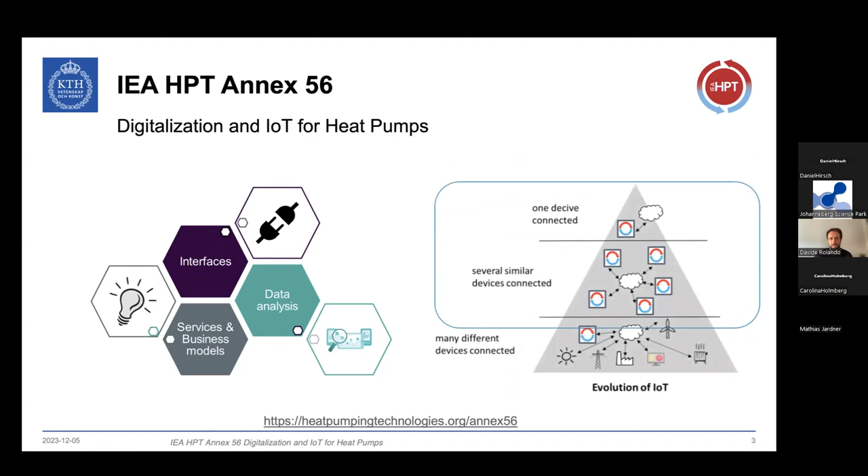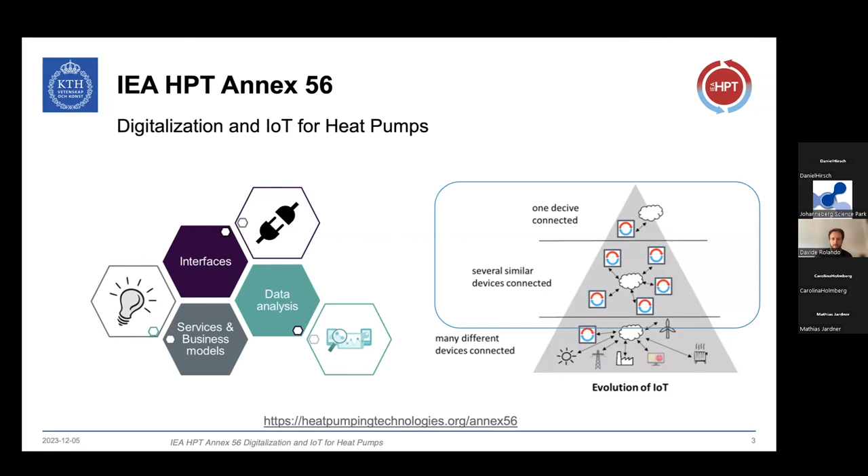Just to define the boundaries we moved within for this collaborative research, you can see them depicted here. We explored the challenges and opportunities of digitalization and IoT technologies for heat pump systems in the case where the heat pump is not just a single unit, but where potentially several units are communicating with each other, and the heat pump is integrated as one of the subsystems in a building.

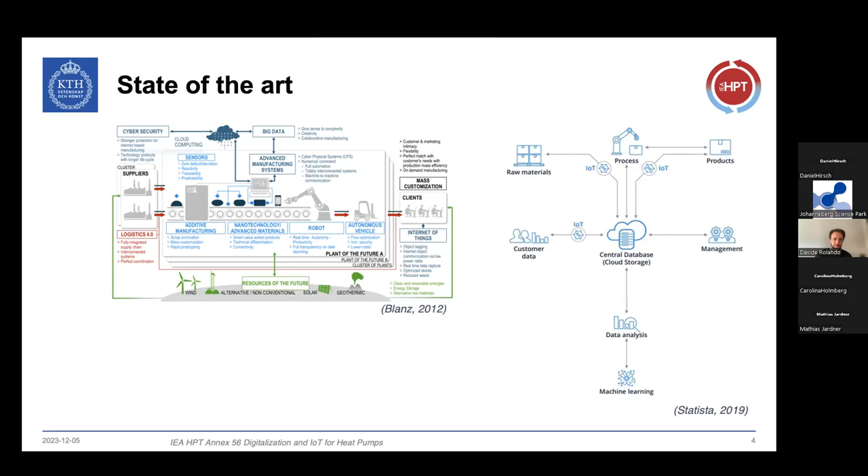I was coordinating the work for delivering the report on the so-called task one, dedicated to the state of the art. In that report, which I invite you to read, and I will tell you later where to find it, we started with the definition of Internet of Things that probably everybody has heard of. But it's important to focus on the definition and what it implied for the industry and for the development of this type of technologies.

In this definition, from 2005, there is a marked shift in paradigm from what was conceived until that time as communication machine to machine and between persons and computers. At that time, the idea was that communication was extended more broadly to things, in a broader sense, not just specific devices, which would be capable of transmitting and communicating information to each other, to other machines and to humans. And this marked a shift in the industry, where buildings and all the subsystems in buildings were also involved.

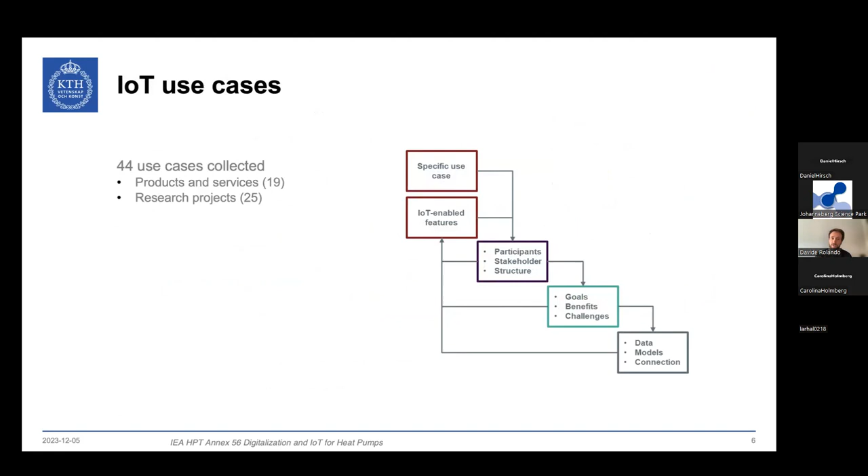So what we have done within the annex, to clarify what is possible to do with these solutions, is we collected a number of use cases. All the countries involved in the annex collected a few use cases. 44 use cases were collected in total. They are divided in two separate types, products and services and research projects, and they were categorized into these 5 categories.

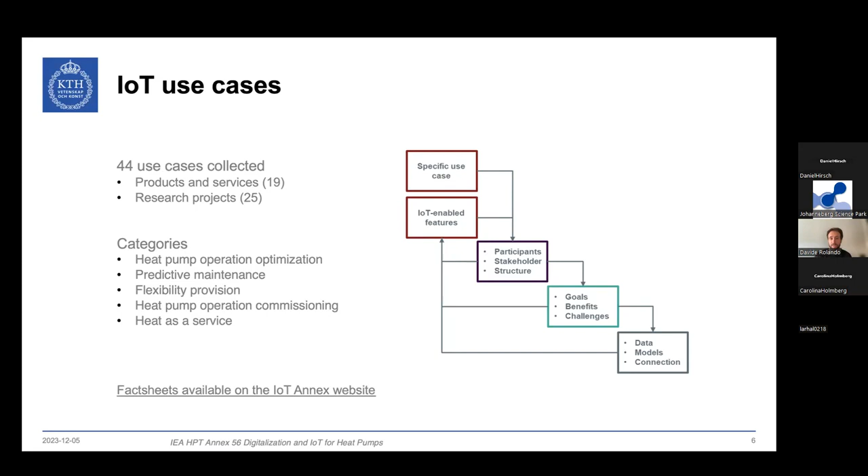With the idea of having these use cases easy to browse and as informative as possible, we defined this template, this framework, to which the use cases were framed, and we had one fact sheet produced per use case. On the Annex 56 website, you can browse the fact sheets by type, by category and by country. The fact sheets are just 2 pages with a very straightforward summary of the use case.

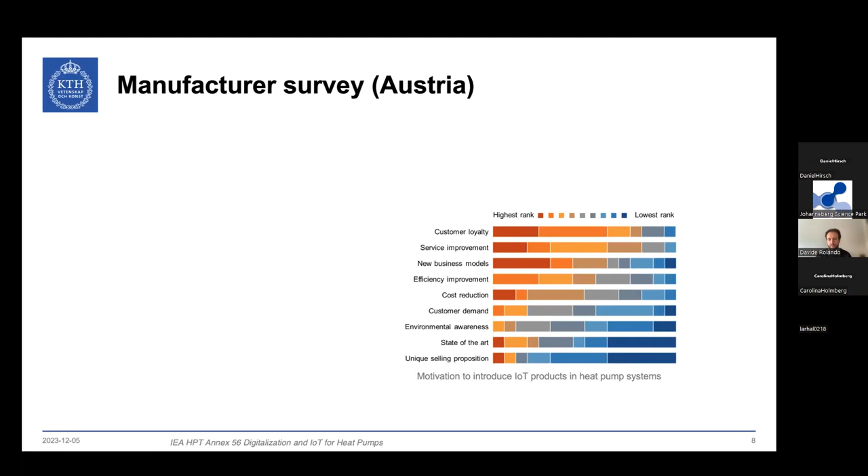But also in this annex and in this project, each country carried out some specific tasks. For example, in Austria, there was a manufacturer survey promoted by the Austrian Heat Pump Association. It consisted of about 50 questions and was circulated through the affiliated companies of the Austrian Heat Pump Association, and a total of 16 companies participated in the survey. You find the results in the report.

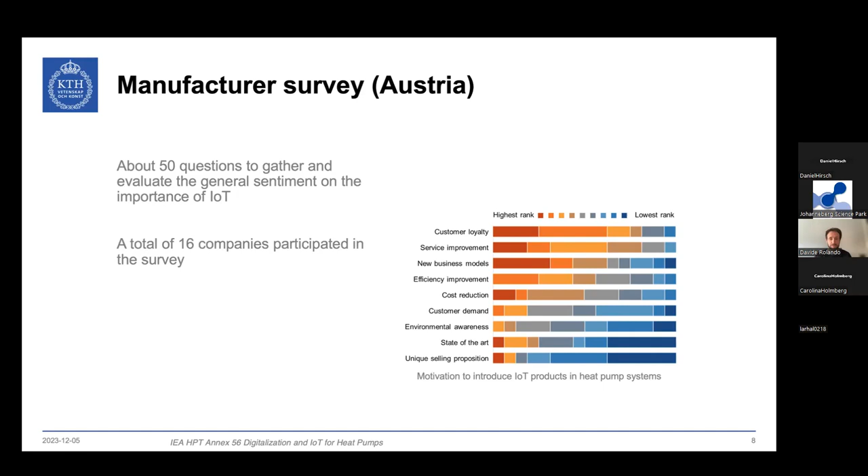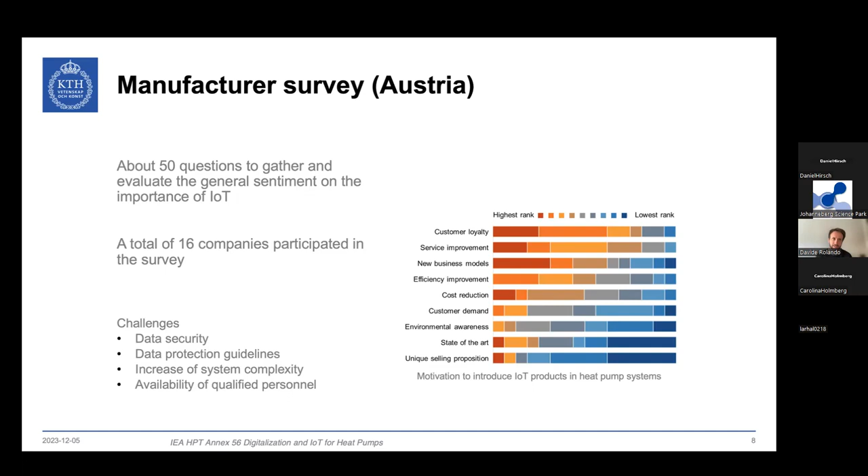Here on the right you find just an example of the type of questions and results and how this survey was formulated. It was clear from the results of this survey that there are some clear challenges when it comes to digitalization, related to data security, the lack of data protection guidelines, the fact that digitalization also implies an increased complexity of the system, and the lack of qualified personnel when you want to embrace the digitalization of your system.

At the same time, I personally ran, from the Swedish side of these international specific tasks, expert interviews where I involved heat pump manufacturers, IoT companies, the Heat Pump Association, and consultants. It was not structured as a survey, but more like a chat with predefined questions, so that in principle we went through the questions first.

And the result from that experience was that there was full agreement about, of course, the potential that comes with digitalization for heat pump systems.

There was also agreement that there is a perceived and also a factual lack of guidelines that most of the times leave the actors in the industry a little bit uncertain on what path to take for moving forward towards the digitalization. And the need of demonstrators was also something that was pointed out during the interview, and was common by the people that I interviewed.

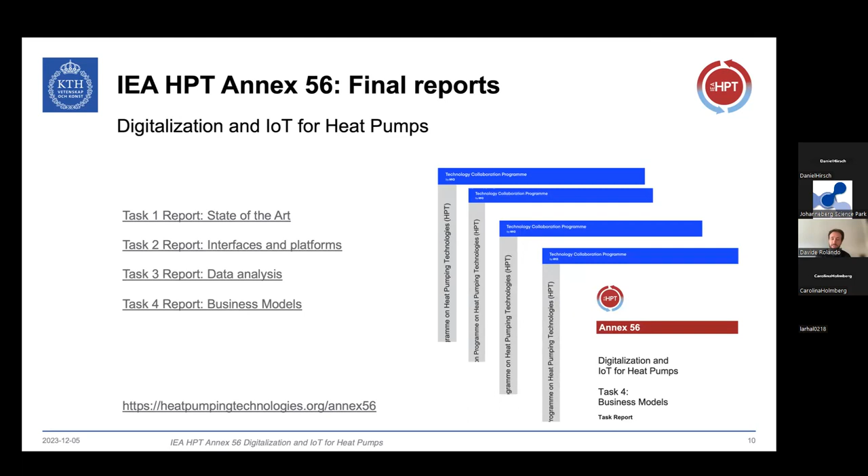Other than the task 1, there was a task 2 connected to interfaces and platform. There was a task 3 dedicated more specifically to data analysis, and the task 4 report was dedicated to business models. That was the international collaboration part of this project.

But then more specifically in Sweden at KTH, we run an activity that was related to digitalization for heat pump systems, and more specifically to the development of data-driven soft sensors. Why that? So in the last few years and in previous projects as well, we noticed that heat pump systems today are equipped with sensors, so data is not lacking.

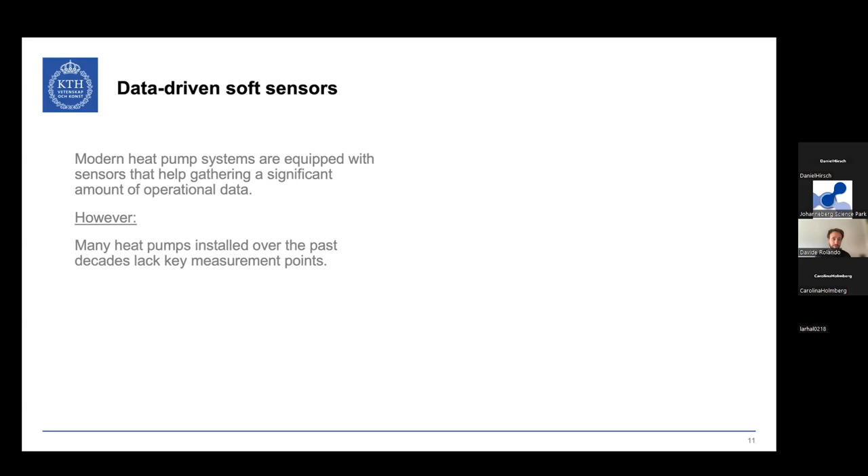The problem is that most of the times the quality of the data and the design of the data infrastructure for these systems is not always satisfactory, to put it in this way. And the issue with this is that you have incomplete set of measurements, and you have a design that oftentimes prevents the elaboration of even simple tasks like tracking the system performance.

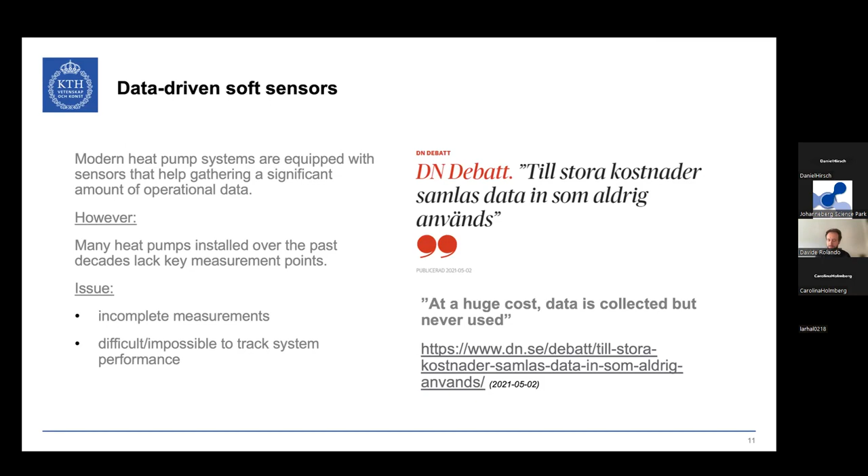And for this reason, and this actually was also, let's say, reflected relatively recently in public. This is an example from a newspaper from 2021 that was marking the fact that data is not missing today, but we are not using it properly.

And we developed a full PhD project out of it with the idea of taking the incomplete set of measurements from a heat pump system, try to enrich it with advanced modeling, and try to figure out what is the potential for enriching incomplete sets of data so that we can retrieve meaningful information out of it.

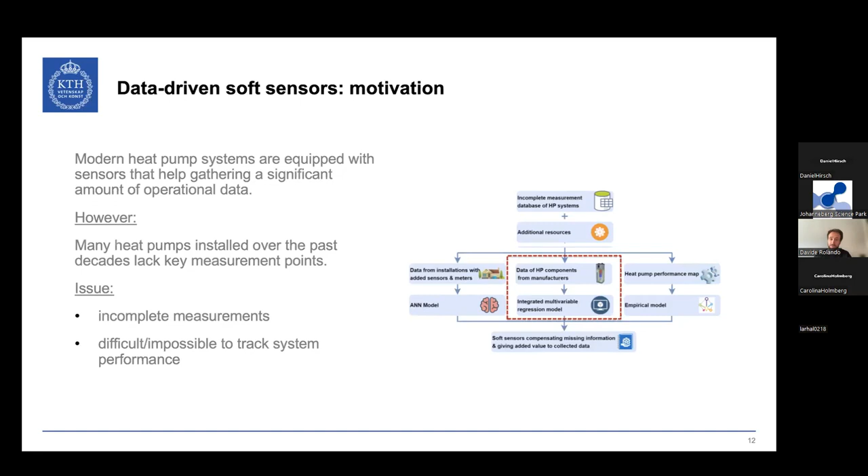The potential for this activity is multifaceted, in the sense that we want to work with data sets that have been collected so far, maybe over years, and the information is covered because, again, the design was not performed properly. For example, the data set could be not complete for other reasons. And with the combination of advanced modeling to the incomplete data set, we want to show that it is possible to give added value to the data collected.

At the same time, for new systems, there is a potential enabled from this type of activities and from this PhD project especially, that is related to the fact that you can optimize the cost of your monitoring system if you have a way to develop soft sensors that can, in a reliable way, replace potentially costly devices for your monitoring system. And this would enable services, for example, connected to performance degradation and fault detection, that oftentimes require a full monitoring system deployed.

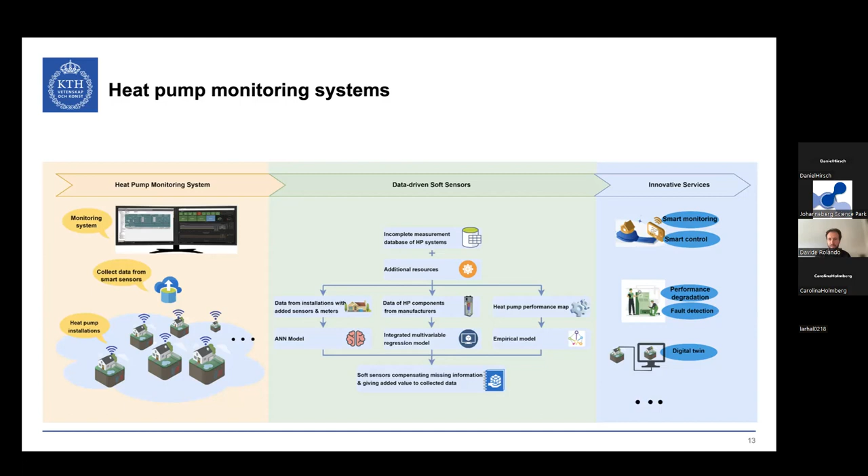From previous projects run at KTH, we know that, where the reported faults to heat pump manufacturers were collected, contrary to what it could be expected, the control and electronic faults were the ones with the largest share among all three types of heat pump unit that you can see here.

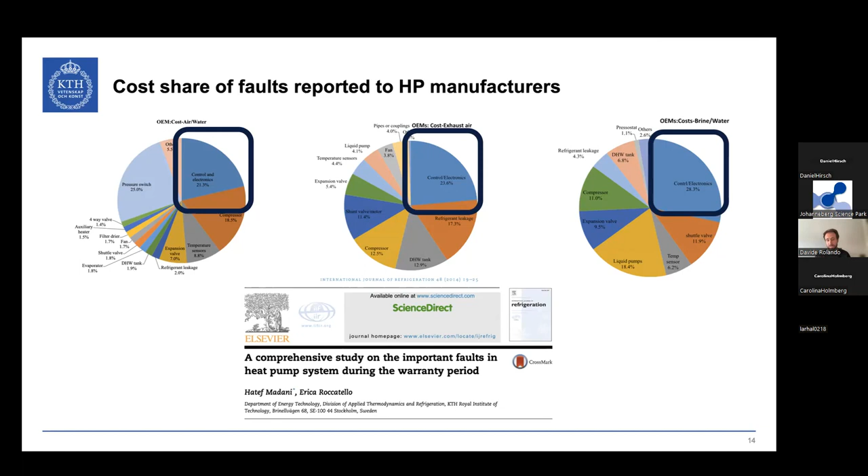So for this reason, we believe that this activity is very relevant to enable services that can help the fault detection topics.

I cannot go into details of the results here, but for example, in the first publications from this PhD project, we compare the potential of three modeling approaches and a combination of three modeling approaches. And we found out, for example, that artificial neural networks have a huge potential, provided that the collected data comes with a reliable level of accuracy.

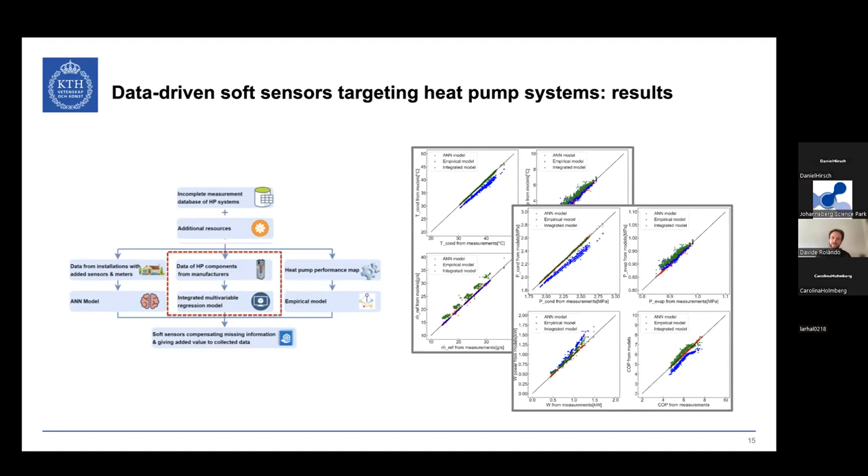These activities and this project were presented also at the International Refrigeration Conference in Paris in August, and it's been presented this week at the International Conference on Applied Energy. The project will finish in the middle of 2024. So I invite you to follow up for the final results of it. And this was all from my side. Thank you.

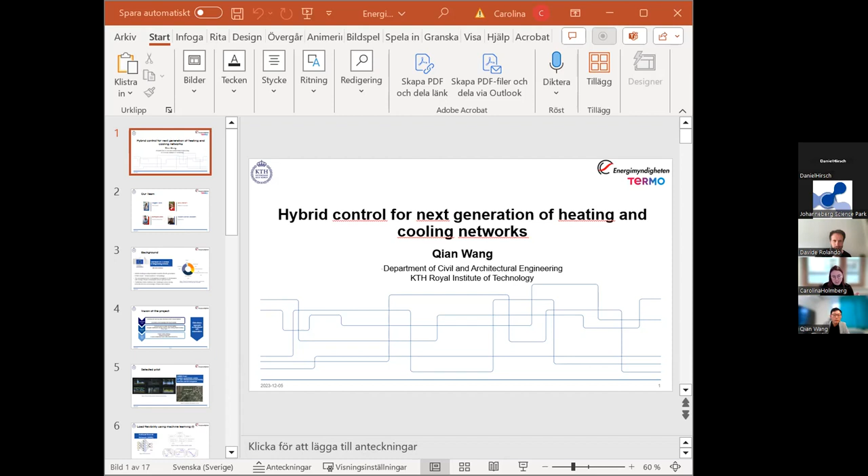Thanks, David, and thanks, Carolina, for the instructions and also the presentation. Please let me know if you could see my presentation. We can see it, but it's not in presentation mode. Okay, now something is happening. Is it better now? No, it's the same. We'll stop sharing and share the screen again. I don't know if you have two screens right now; you might want to change which one it is. Okay, now we still see your notes. If you press slideshow from the beginning in the upper left corner, I think it will work. Nothing is happening. Do you want me to try and share your presentation instead? Yes, please. How does this look for you? No, same problem as before. In that case, I suggest, Qian, that you share your presentation yourself and minimize the pictures at the left bar. Sorry for the troubles. I will just maximize the slide. Perfect. Or as close to perfect as can be.

Sorry for this. Yes, I will start with my presentation, and I'm also from KTH, Department of Civil and Architectural Engineering. And today I will talk about the hybrid control we have been working on for the next generation of heating and cooling networks. This is also developed as a PhD program, and actually one of our PhD students is here in the audience. Before I start, I would like to first acknowledge the team who has done the work, the PhD student Yangzhe, and also we got support from other researchers and postdoc researchers and our research engineers who have been contributing in this work.

More important, of course, is that we have also created sister projects with one of our European projects that is funded by the European Union, called Hypergryd. And we want to also develop some synergies at the same time to collect data and see if our solutions in Sweden can also make an impact on the European market when it comes to heating and cooling, in particular district heating. So this project has been very much motivated by the transition needs on the European market when it comes to district heating and also local heating and cooling networks. For example, the transition toward the fourth to the sixth generation of district heating.

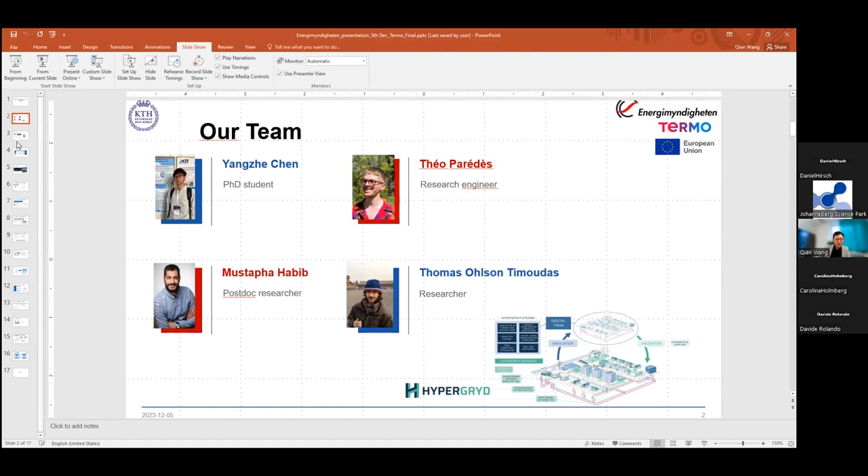Yeah, this is the acknowledgement I was talking about. Then about the background, we continue with increasing need for integrating renewables in the heating and cooling networks, because there has been a lot of discussion about how we can couple the energy networks in terms of both thermal networks and the electric grid. In this case, we want to utilize the thermal assets as flexibility potential to release the grid pressures.

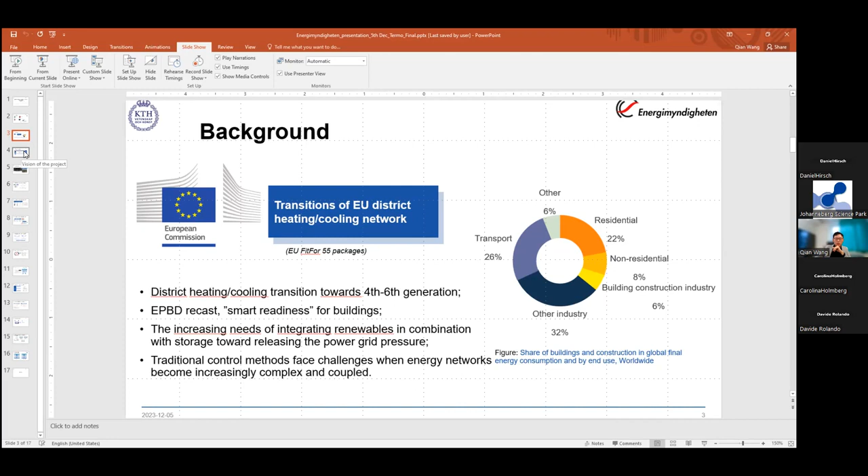And with all this background, we realized there's a big challenge we need to solve when it comes to controls. And this is how the project has been born and developed. In principle, the project has developed within 3 stages. The first one is to understand the load. Why understand the load? Because, for example, in the electrical grid, load analysis has long been developed.

But when it comes to coupling of networks, the load becomes a little bit different because electric load and thermal load have very different response times. And so far, we realize that much of the load analysis has been focused on a case-to-case basis. So the ambition here is to understand how we can generalize the method, using different machine learning or data analysis methods to see this kind of coupled load, and also to achieve better predictions and understanding of the load, to see what other flexibilities we can explore.

The second one, when you have the load, you want to see the potential to integrate different renewables into the current system in order to control them. Because control becomes a very challenging problem when you have many intermittent renewables that need to be integrated as a system approach. So here come technical and semantic interoperability: both how the configurations should be designed when the system becomes coupled, and how the data should be more interoperable.

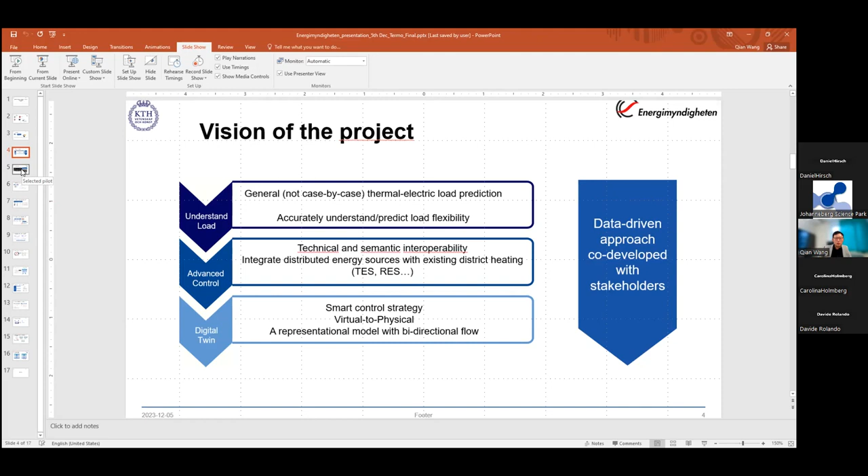And in this project, we want to highlight one important challenge and need: such data-driven approaches we really want to co-develop with stakeholders, because we want to make sure the results can be useful, for example, for the utilities and the building owners. And we want to understand how such communication can be done better in future research projects, so that the results and methodologies we have developed are of use.

As mentioned, this project has been co-financed by the European Commission, and one of the first steps has been to select a typical use case. So here is a project we have been running, and we have selected one of the project's pilots in Austria. It's an interesting pilot because it has a local CHP network, so it provides district heating and cooling locally.

And there are many possibilities to integrate renewables, for example PV systems, heat pumps, different thermal storage and batteries. On the other side, we have already installed different IoT sensors and energy meters, so we can analyze the data locally at KTH to understand the different scenarios and how co-simulation can be developed through such a use case.

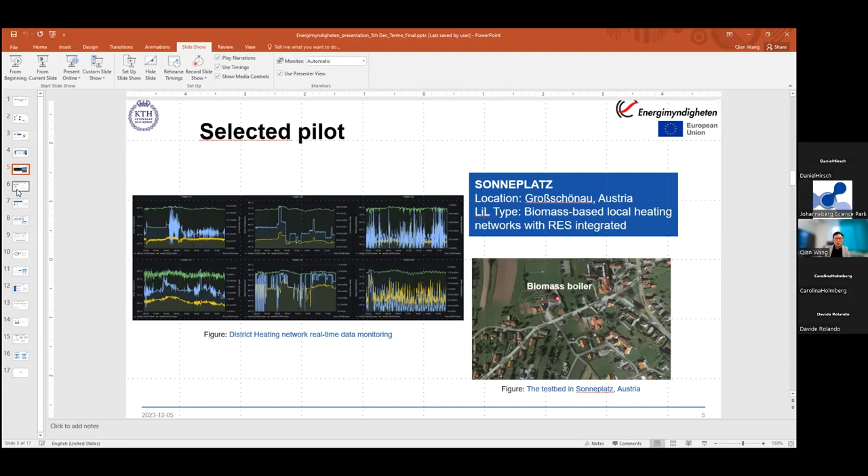In the past 2 years, we focused very much on different analyses of load flexibility for coupled networks for future heating and cooling. The first try was to use artificial neural networks. This is quite common; it is the basis of machine learning. And we wanted to see how a short-term prediction model can be developed.

In this study, we selected a use case from a typical Scandinavian climate, with different buildings that are district heated using the current district heating network with rather high temperature. And we realized that with rather simple neural networks, it's possible to achieve higher accuracy than our conventional method. But of course, this relies very much on how good the data you can get is, as David said in the previous presentation.

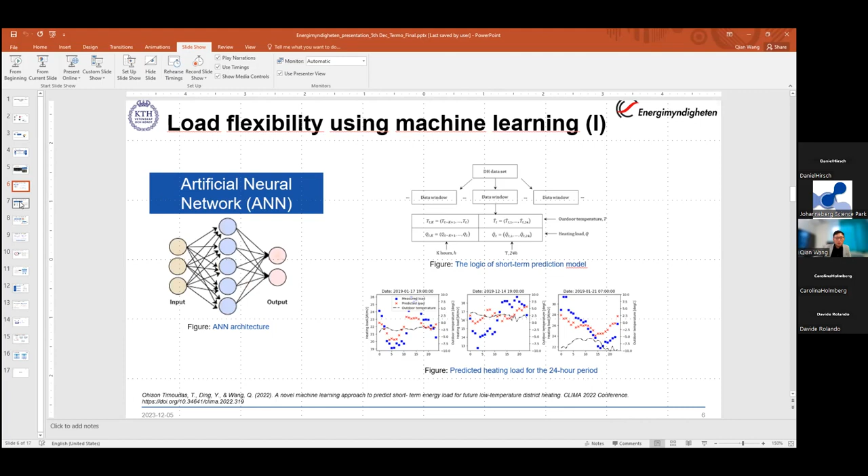So we want to bring up this a little bit more to see, for example, if the data quality is not nice enough, or if there are other alternatives to understand the load better with limited data qualities.

So in this work, we continue with the previous work and using similar data sets in the same district heating and climate. We developed a new methodology, or we modified the first type and used more data pre-processing processes to deal with this varying quality of measurement. So clustering method plus ANN model was used as a methodology to analyze this kind of data.

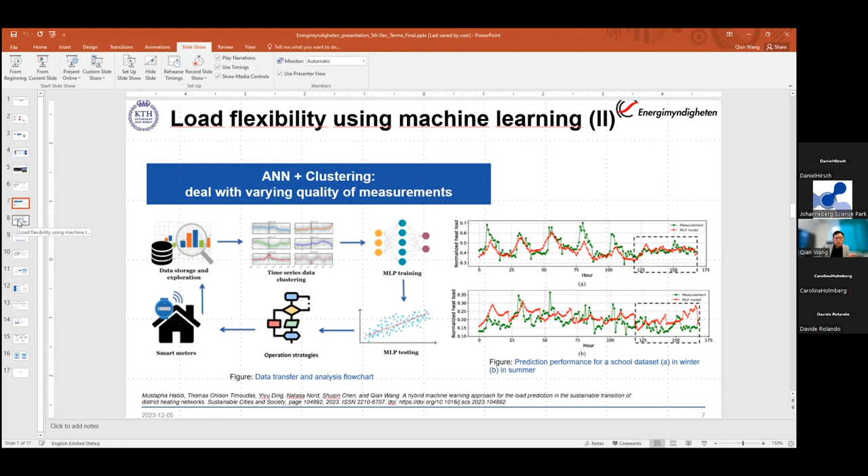And actually this paper has been published, and the results are rather good, we believe. And we can actually understand this kind of load flexibilities in a Scandinavian climate and the current district heating data sets.

But then we realized a challenge during the development, because many of these studies were based on, as we said in the beginning, the case studies. It's very important the methodology and approach we have developed can be generalized, because we don't want to develop a new method every time when it comes to a new district or a new building.

Then we continued with this work, trying to develop a more general load flexibility analysis approach by combining many different types of data sets in different climates, even different building types, and different district heating status to see if this kind of machine learning approach can deal with variations of loads in a more generalized way. So of course, validation is very important here to make sure whatever method we develop is verified, and this can be utilized for different utilities or different climates.

In this case, we developed the validation method, both parallel validation. Here it means that we want to check if the model is robust enough to predict the load for the same building, but different years. Why? Because, for example, the building has been renovated, or there have been different changes to the building, but we want to see if this kind of approach can predict well.

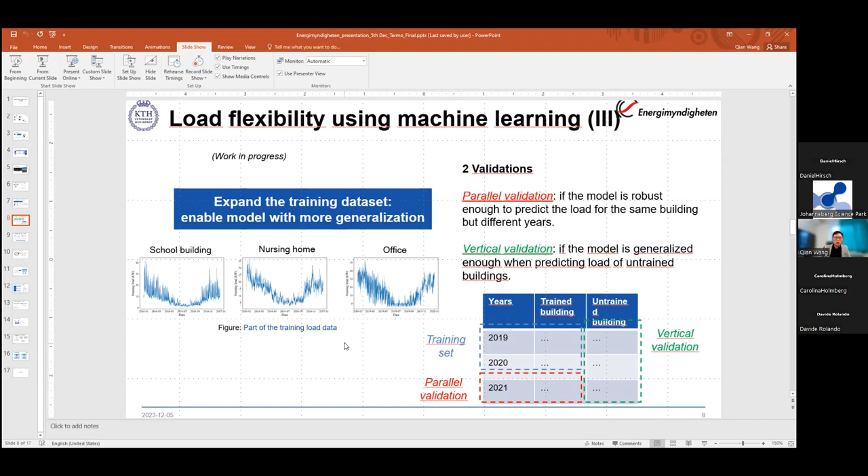And another one is vertical validation. You can see here if the model is generalized enough when predicting load of untrained buildings, because when you train the data set, you need different times. Then you need another time series data set to validate it. So we want to perform both different approaches to see if the method is good enough.

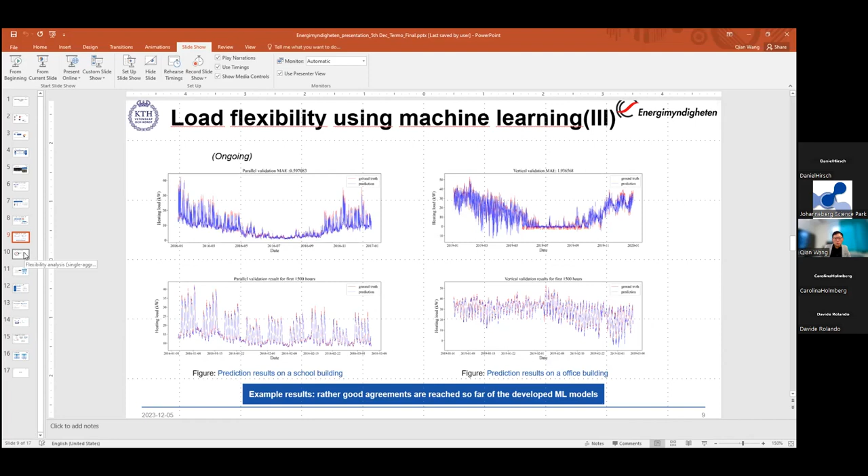This is ongoing work we just finished this year, and we could see that by validation, we can actually achieve rather good predictions and analysis of the coupled loads from different climates and building types. So this is a good finding. We have found that by using such a data-driven approach, it is possible to analyze the flexibility potentials and provide the basis for the next step of control, because you can predict the load and analyze the load more accurately now.

And we try to develop this work further, because the previous approach was very much focused on individual buildings, but of course this is not realistic enough, because district heating usually heats a district, on aggregated levels. So then we developed into a direction of how different buildings in one district should be coordinated in order to have the aggregated flexibilities. This is also ongoing work, to see how buildings can coordinate with each other, because each building's flexibility may not be the same as the aggregated flexibility. So there needs to be some optimization performed to see how we can manage the load and the impact on the district heating network and power grid.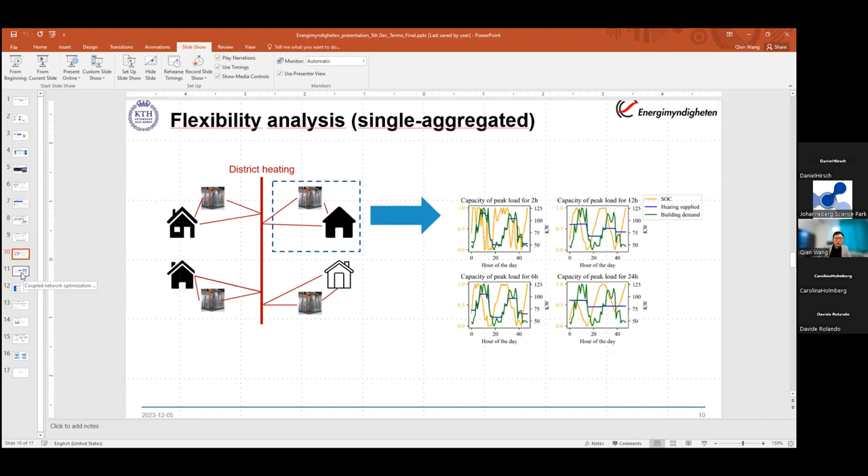And then, of course, when you have a district, you want to develop co-simulations and network optimization to see what are the potentials to integrate renewables, for example, heat pumps or PV systems, as a node of this coupled network. So we have been in collaboration with industry partners who are experienced with network planning. And the next step is we want to optimize such coupled networks for both thermal and electricity networks, using steady-state thermal network simulation and quasi-dynamic thermal network simulations, and achieve coupled network modeling.

And particularly here, for the future generation of district heating and cooling, storage plays an important role, because to increase the flexibility, we have to first understand the load, but also understand the capacity of storage in terms of both thermal storage and batteries. So in the next step for the coupled network, we want to focus very much on the potentials and benefits of integrating heat pump and storage solutions in these kinds of coupled networks.

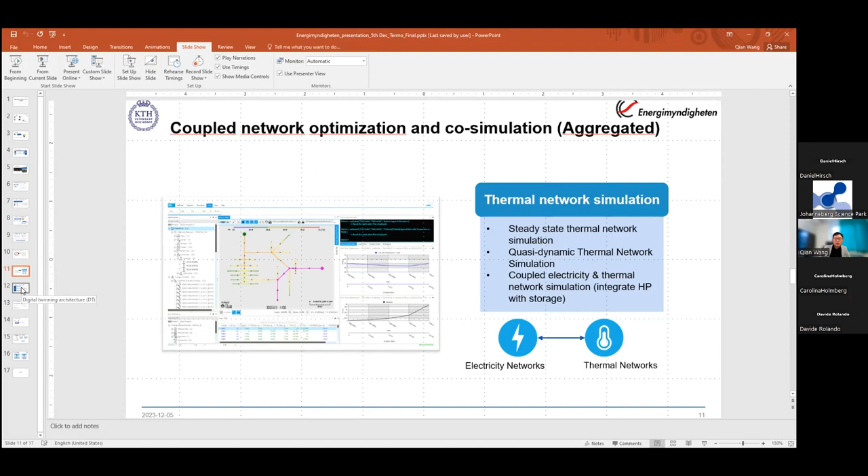For the digital twinning concept, we realized a lot of challenges if you really want to develop a digital twin, because here we are not really focusing on the visualization part, but rather the data digital twin. As you know, there are different manufacturers of heat pumps, and different utilities have already established platforms and ways of operating the data. So actually it's not lacking of data. I agree with what Davide said, that it's not really lacking of data, but it's lacking of interoperability.

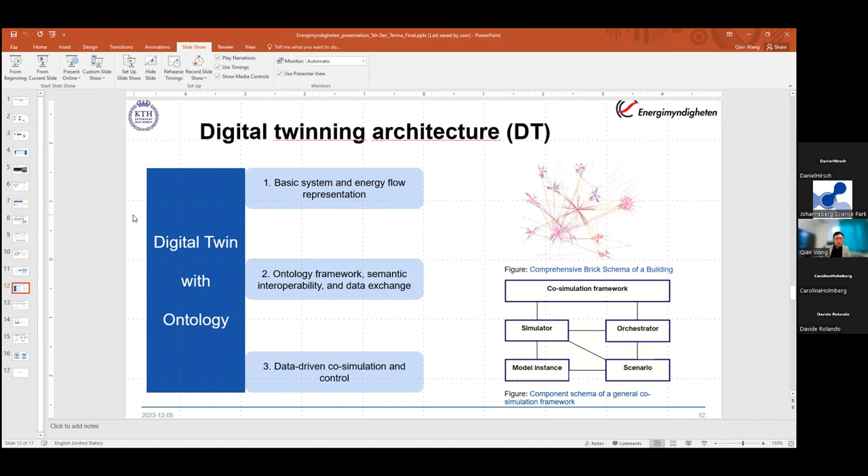Because when we have many suppliers of data, how can you really combine this data and make standardized or normalized data models in order to run the twin simulation, because you are using different languages. And here we have been very much starting with using ontologies to solve this problem. For example, we had the first try.

You see a simple and typical Swedish heating network ontology that is using an FTX system with PV and heat pumps. And we found the relationships of the data models. These are some preliminary results we have studied. For example, the ontology for the heating network that is connecting different ventilation systems, which actually is FTX here, and also connecting to the thermal storage and heat pumps.

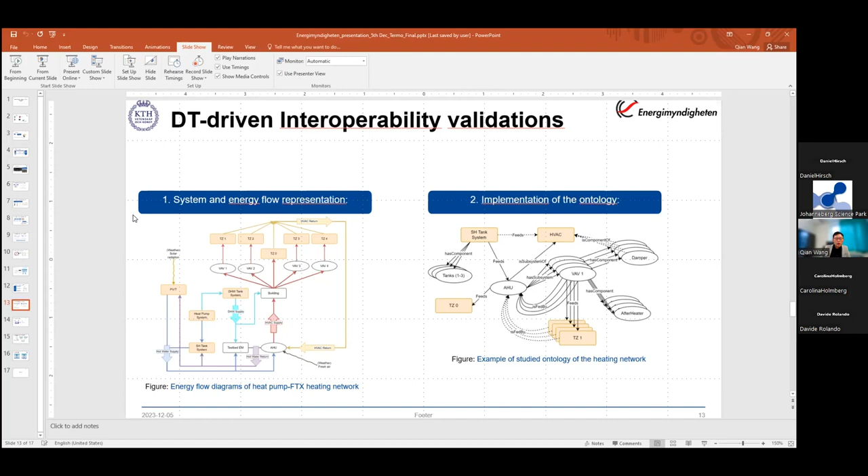For the next step, we are very much interested, of course, to develop new control systems, because we did some previous literature review about what are the real technical challenges when it comes to controls. And there are quite many limitations when it comes to existing control systems, because fixed rules, regardless of which type of rule-based controls, are not technically flexible enough to operate this. And also the complexity, as we mentioned, is a big problem.

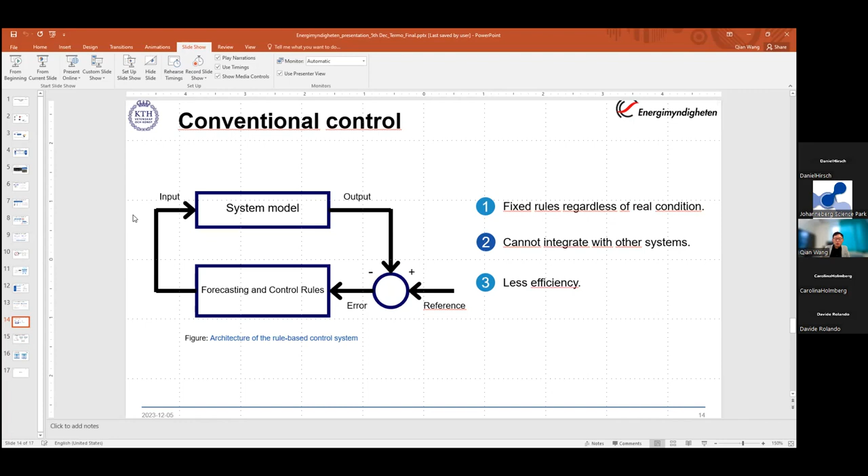And we want to also improve the efficiency of the control system, so you are not fully relying on huge computing power. In this case, we performed a deep analysis and literature review. What are the promising future directions we should focus on? And one of the solutions from the existing studies is, for example, integrating reinforcement learning in such kind of control algorithm development. But we also found some limitations there, because for the community more into control and machine learning, reinforcement learning was understood in a little bit different way.

Because we need to make the control very practical for the buildings so that they can actually perform it efficiently. For example, for such kind of learning, the building has to generate a lot of data and also different types of data rather fast; traditional reinforcement learning is only able to cope with this kind of data generation. But for buildings, this is not really realistic. And also we can choose, of course, simulated data or synthetic data to train the model. But then the result will be only suitable for the simulated building or simulated energy system. This is not useful enough for the actual building, because the building is very complex.

And in this case, we found some interesting solutions that could be combining different building sets to really train in a group to see how such kind of control can be developed. So this comes more to the direction of transfer learning, to see if transfer learning and meta learning can solve this problem, for example, using multi-agent learning. The reason is that when you have different buildings, different data sets, you can actually meet the data requirement for reinforcement learning and see how this can develop robust control strategies for the building.

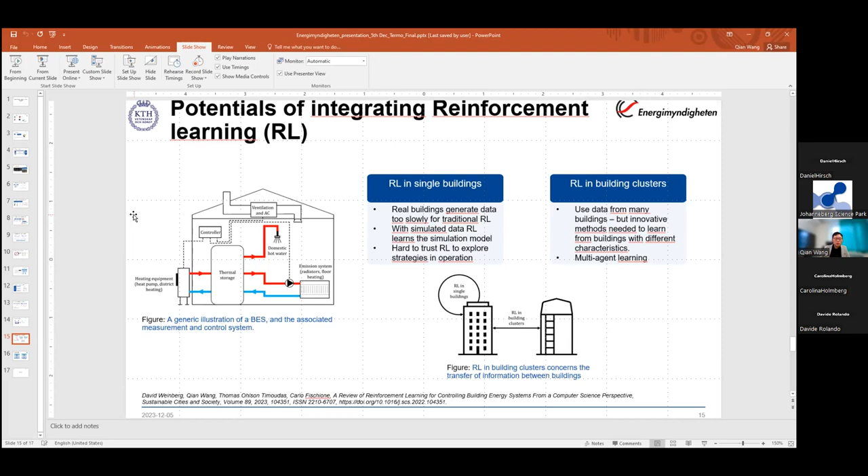And a little bit on the next step of research. We have divided the future research into two aspects. One is more theoretical analysis. We want to see theoretically if this problem can be solved and integrated with different learning methods, for example, encoding human knowledge into the control systems to see if this is theoretically possible. And the second part is, of course, more interesting.

We want to test and validate in different living lab environments, especially where the thermal storage or other types of thermal assets for flexibility can be proved or verified. In this case, we are collaborating quite a lot with different living labs in Europe and also at KTH to see, from an engineering perspective, if such a coupled network can be controlled and developed as a future digital twin platform, so researchers and engineers can run co-simulations to explore.

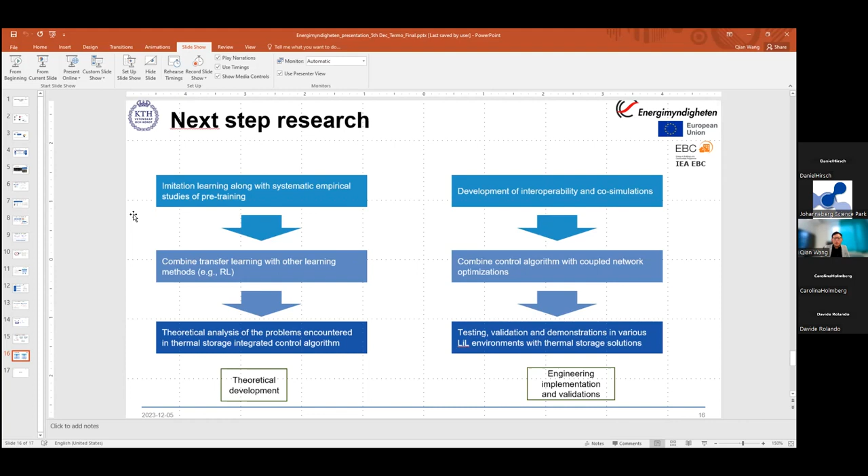So this is my presentation, and hopefully it's clear enough for you.

Thank you, Qian. And yeah, we apologize for the technical problems, but I think it worked out fine anyway. I saw we got some suggestion in the chat of what might be wrong, but I think it worked. We have a few questions in the chat already.

I think I will give you just maybe 1 or 2 more minutes to formulate your questions if you haven't written them, and start by asking you a question myself, both Davide and Qian. If you could just try and summarize really short, what are the main challenges or opportunities, if you want to be optimistic, regarding the digitalization? Davide can start.

Yeah, I would gladly reiterate on one point that I mentioned, and also Qian actually mentioned in his presentation. And the point that probably is public domain is the fact that data is not missing. The challenge that we face today is that data is not missing, and technology is not missing either. The issue that we have most of the times with digitalization solutions for complex systems is the interoperability of the systems.